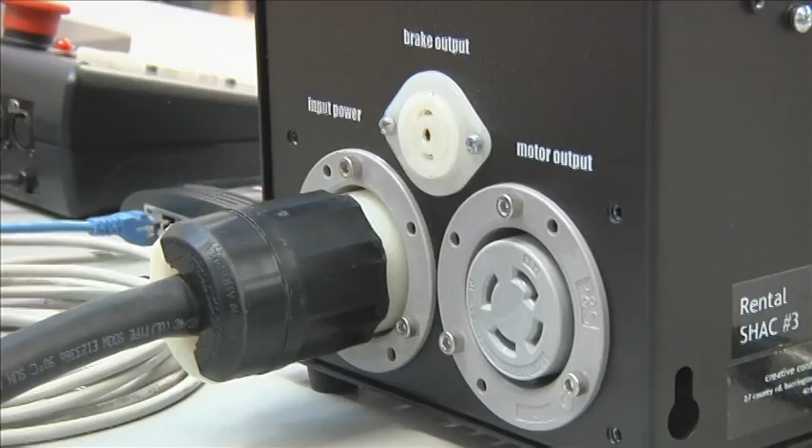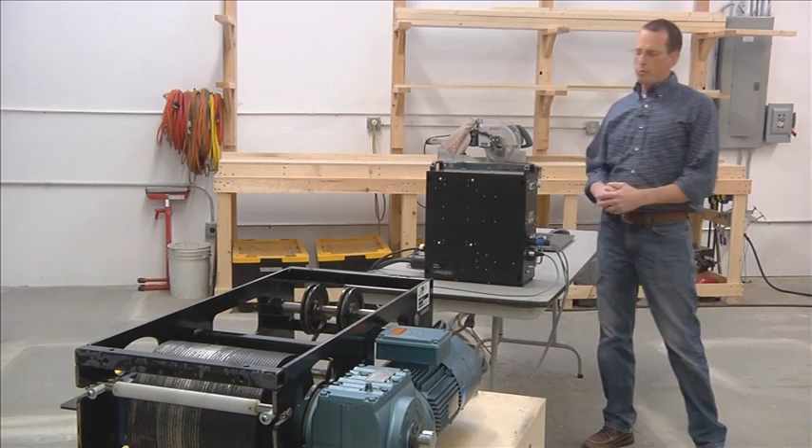Getting the machine running is pretty simple. Connect the power to the stagehand, connect the motor and the brake, then connect the encoder, tighten it up, then the limits, and finally the e-stop. Now we can jog the motor in both directions. That's all it takes to get the motor moving using a stagehand.

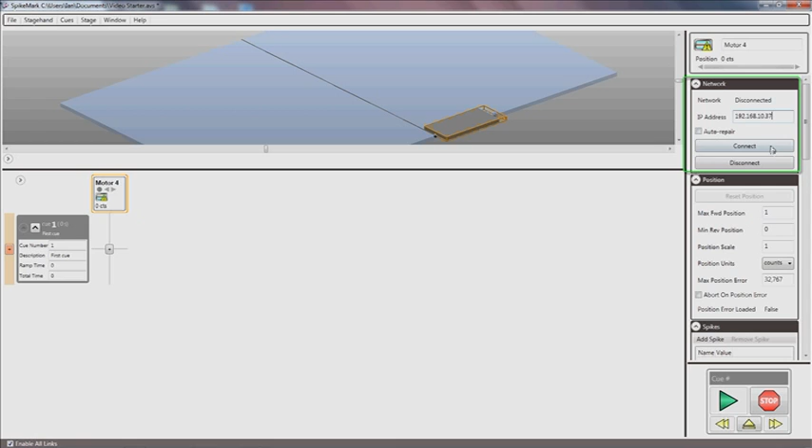Next, we want to get the motor moving with the SpikeMark cueing software. The physical connection is made using standard Ethernet cables run through a network switch and connected to the stagehand. Now that we're wired together, we'll connect the computer control to the stagehand. It's only 3 steps: add a motor, change the IP address to match the stagehand, and click connect. That's it. We can test the motor by jogging it from within SpikeMark.

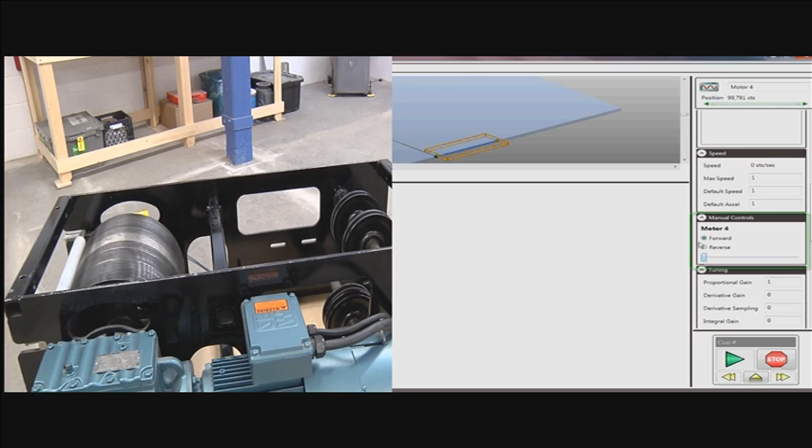Now that we're connected, let's write a cue. In the SpikeMark cue grid, motors are represented by columns and cues are represented by rows. Let's write the new cue: add our motor and give it a destination of 100 inches.

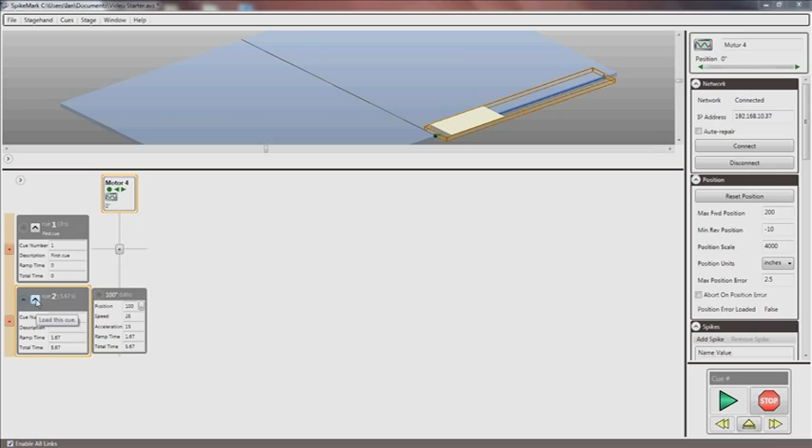Cues are run from the Showstopper cue controller. It's as simple as loading the cue and pressing the Go Cue button.

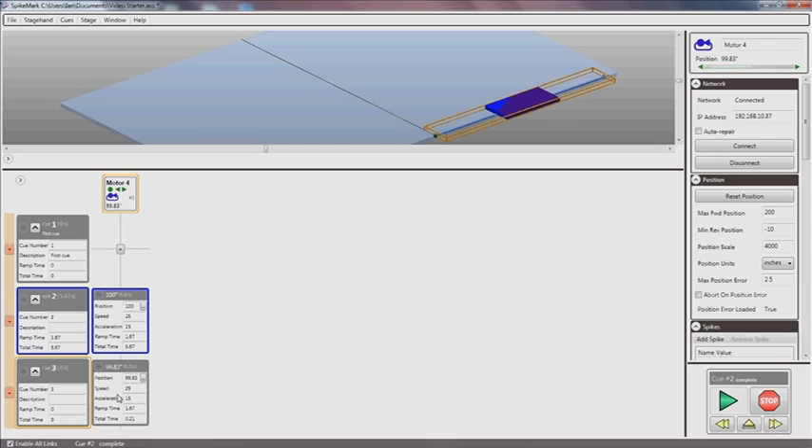This is a good time to point out one of the great features of SpikeMark, the stage model. The motor is represented by a wagon on a track, and that graphic moves dynamically with the cue. I'll write a new cue, returning the wagon to the offstage position. When I run the cue, you can see the stage model reading the position information being sent back from the stagehand and updating the position of our wagon on the screen.

Of course, most shows have more than one motor. This is our revolver machine for edge-driving turntables. Each machine has its own stagehand, and we've got one hooked up right here. In SpikeMark, we've added it to our setup.

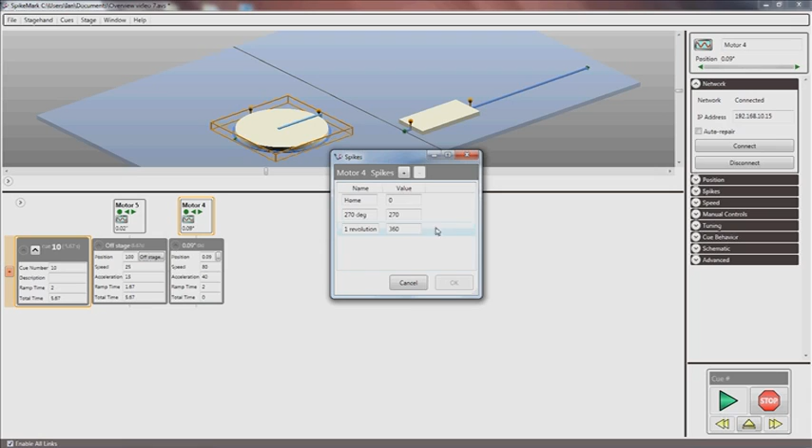Let's take a look. Let's add a new cue, add both motors, and give each one a destination. You can see we're using names for our positions. We call those spikes, which behave like virtual spike tape. The beauty is that if you change the position of a spike, that change is carried through all the cues that use that spike. You can see we've added a graphic in our stage model to represent the turntable.

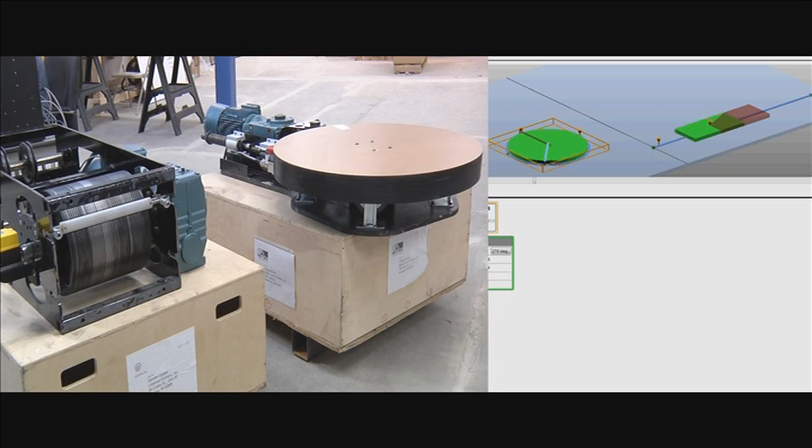I'm going to make this a time-based cue in 6 seconds. Now we'll load and run the cue, and you can see that both motors finish simultaneously in 6 seconds.

We've shown you how easy the Creative Conners system is to use by cueing a multi-motor show in just a couple of minutes. But it can also handle complicated shows with advanced features like cue linking and the control of input-output devices like snowbags and trapdoors.